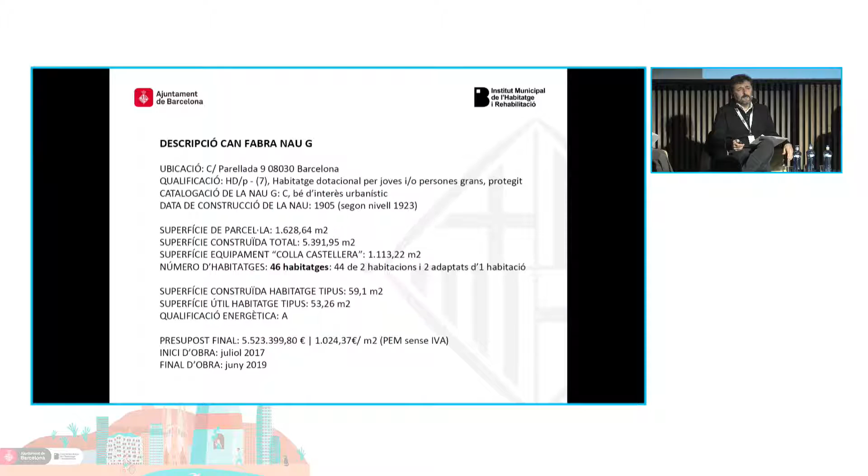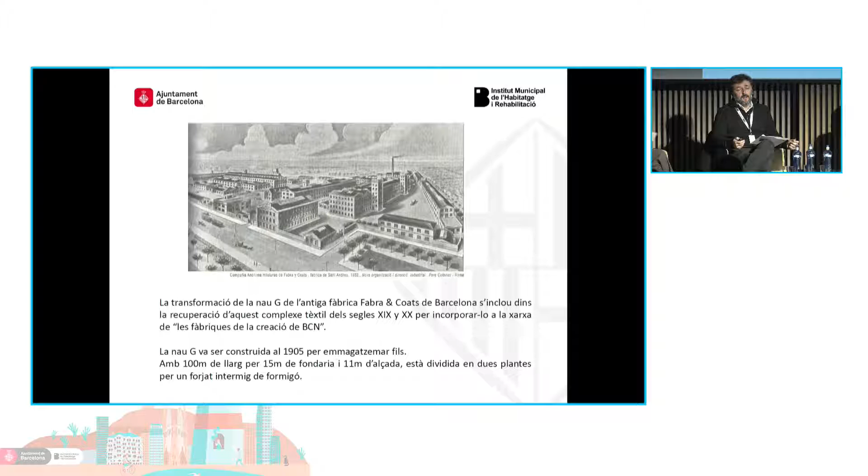Let's start with the Can Fabra G Nave. It is an old factory premises. The structure of the factory is 100 meters long, 15 meters wide, and 11 meters tall. It's split into two stories, two floors, and the purpose of the commission, which was innovative in itself, was how to bring together this structure - how can we combine such a factory structure with the construction of housing inside? The purpose in itself was quite innovative.

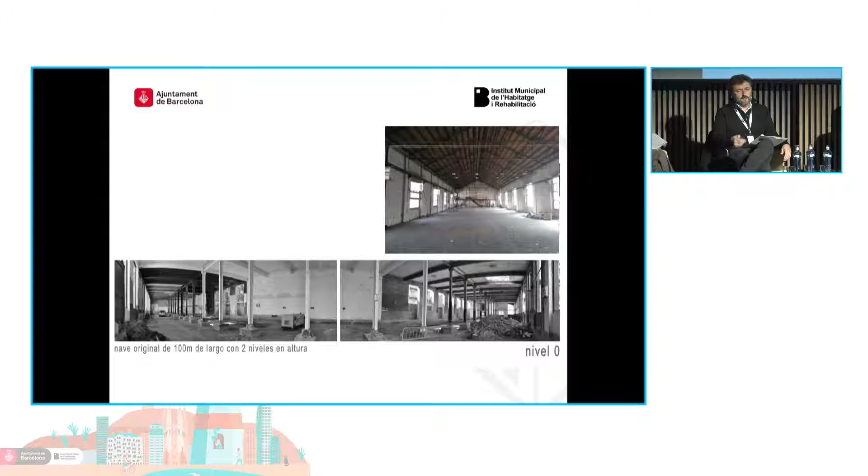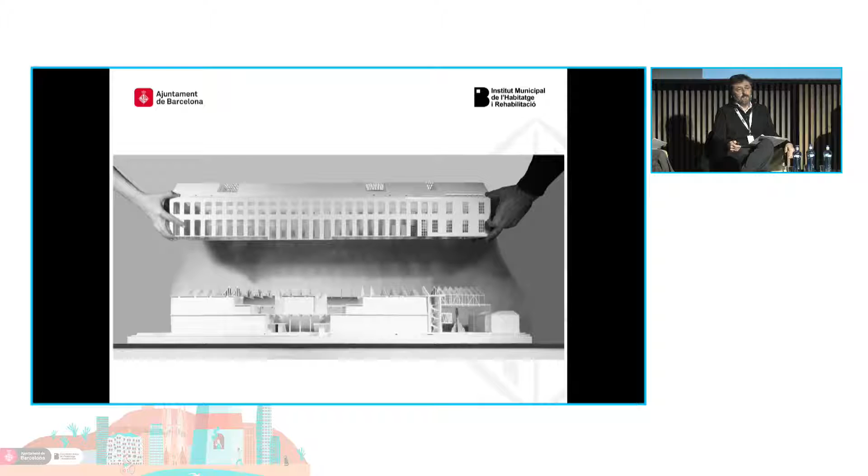These are some views of the original factory. This is the first story and the second story with completely clear structures, and we wanted to build as respectfully as possible.

We wanted to include wooden elements. This image is very clear. This is what existed in the past, the open plan floors, the two levels, and how these wooden modules can be included in here. In the end, we will have 4 stories within the envelope, within the original structure.

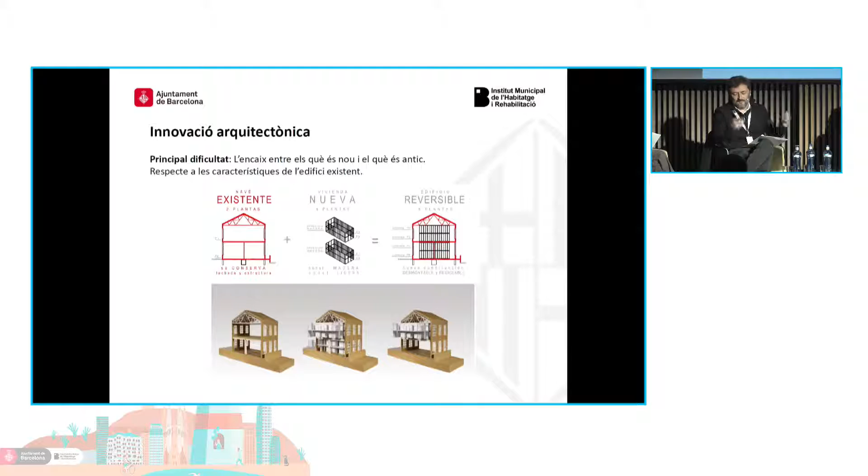This allows us to say, okay, let's do this reversible. Let's undo the woodwork if necessary, although that's not the purpose at all. These are some of the images, some of the views from the inside. Most of the housing is done in wood.

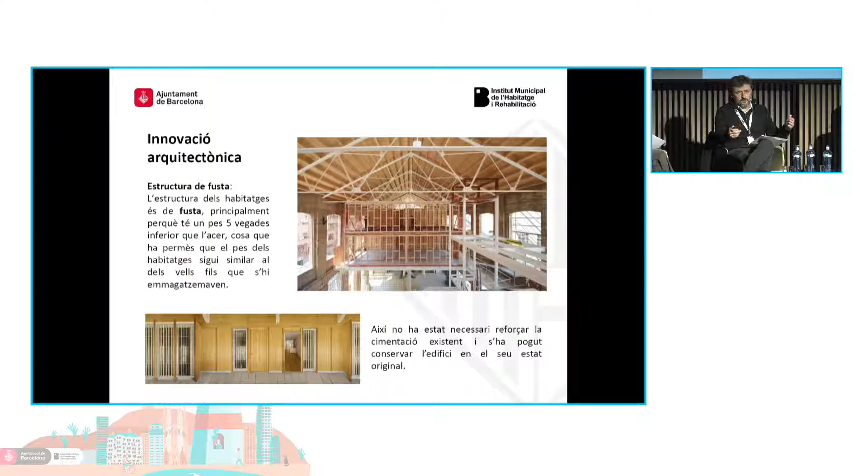Why? Well, because wood is lighter than steel structures, and this allowed us to avoid having to refurbish the outer structure and the foundations. It's drywalling, all assembled, and it can be disassembled in the future if necessary.

We now have, well, the old building, the old envelope acts as thermal insulation, and we have 2 corridors for air circulation. It acts as thermal buffer, and the top is like the roofing of the buildings.

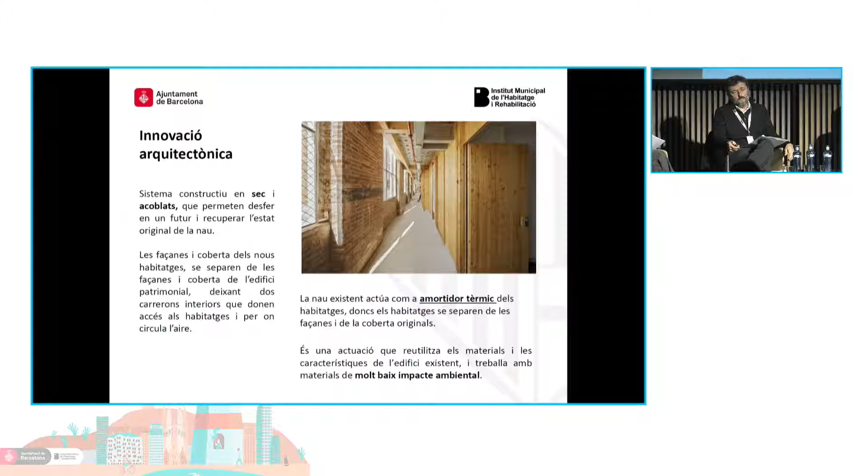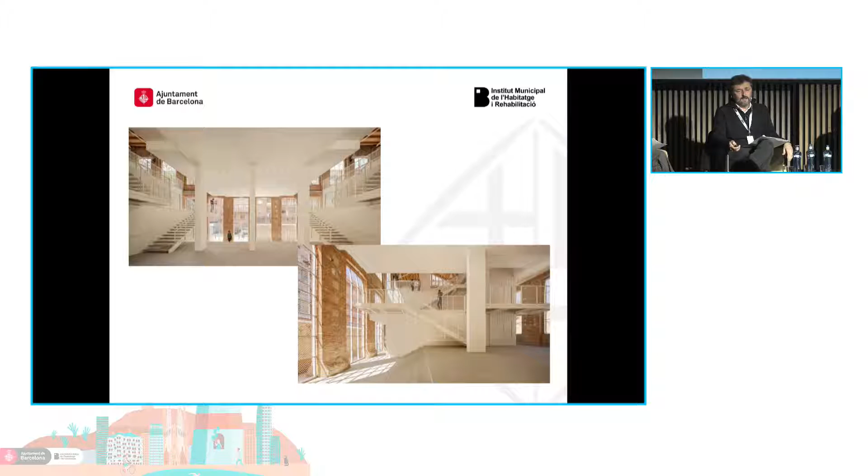We looked at an initial plan. Actually, the work that we started on that chapter stopped with the pandemic, but we were discussing with the neighbors about what could be the eventual use of all these areas. So you see, for instance, the lobby, which is really huge and can have a community use.

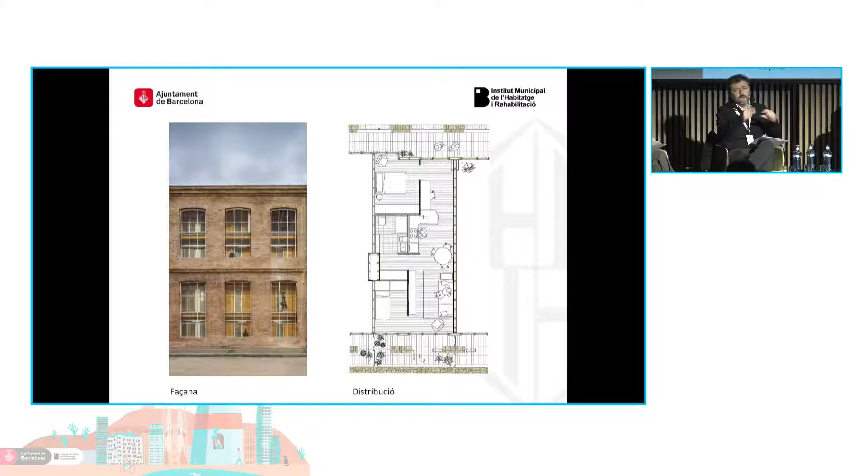This is the design of the plan with the 2 corridors which are left there inside of the warehouse building, but outside of the housing units. This is the look, the general plan of the factory.

And then we wanted to look at the different models, and not only architectural or social innovation, but rather to study the model. And this provisional proximity housing. Here we proposed to reuse maritime containers to create structures that would allow for quick accommodation.

This is an innovative element because we are reusing existing elements. It is quick. It takes much less time to put together a development of this sort than with traditional housing.

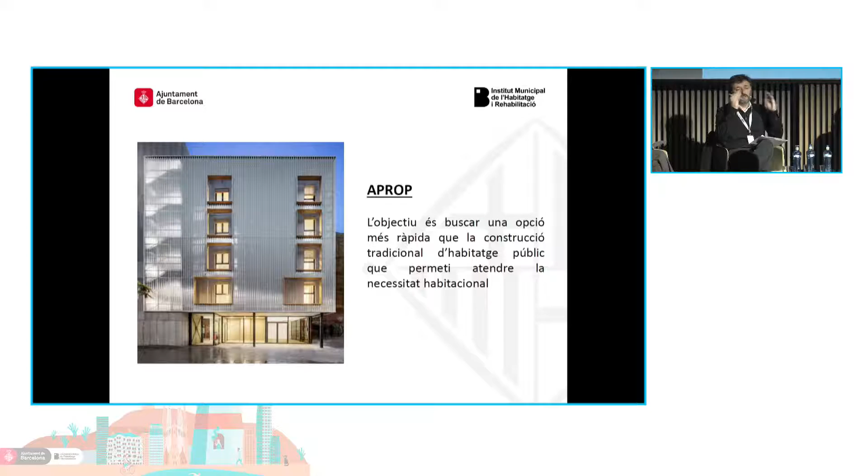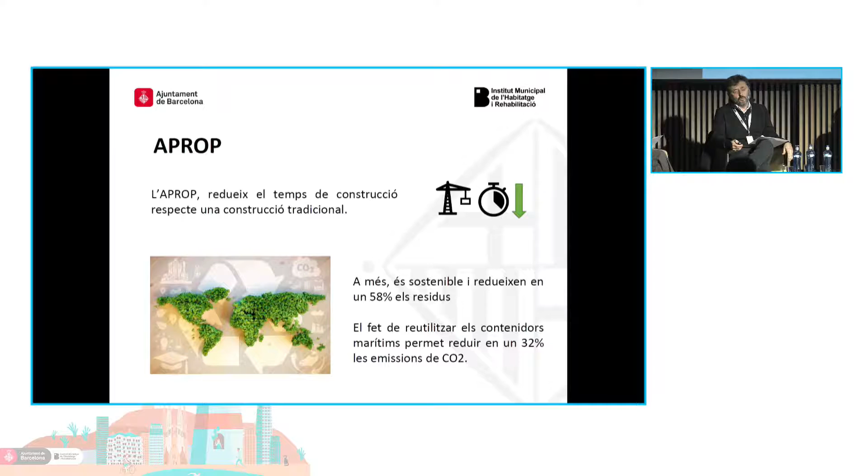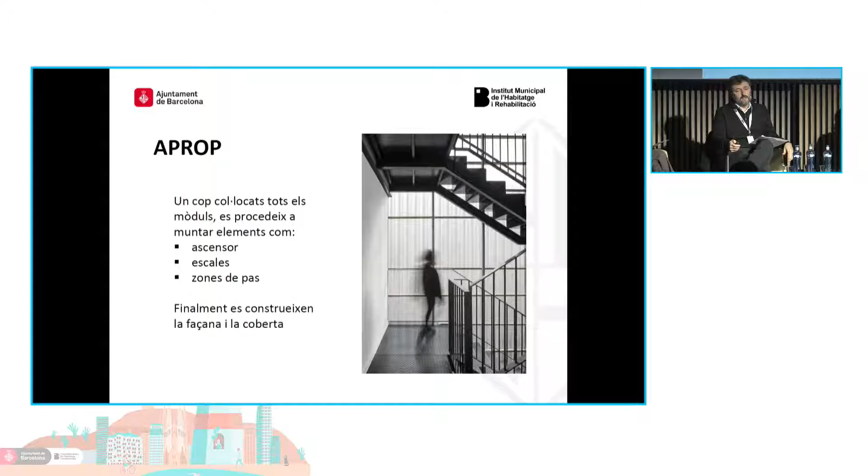And then the cladding of containers, of the original containers, we said that this was a quick way of reducing 58% of all waste. We have a lower CO2 emission impact. Once everything is built, then we install the elevators, the staircases, and all of the common areas.

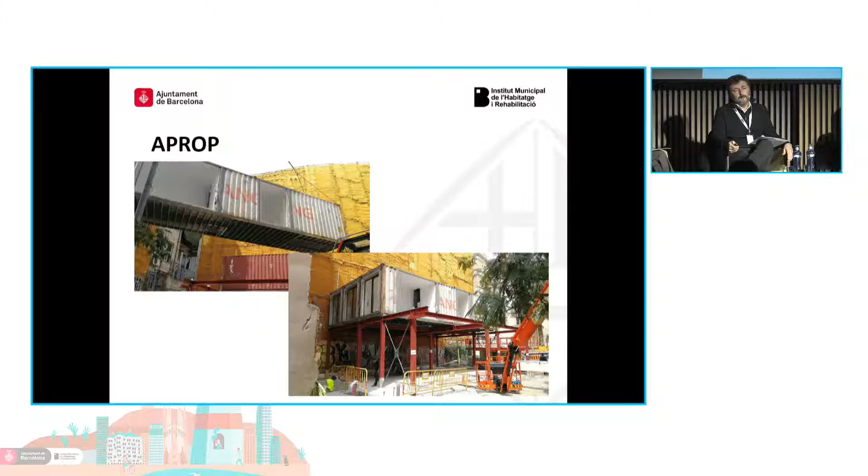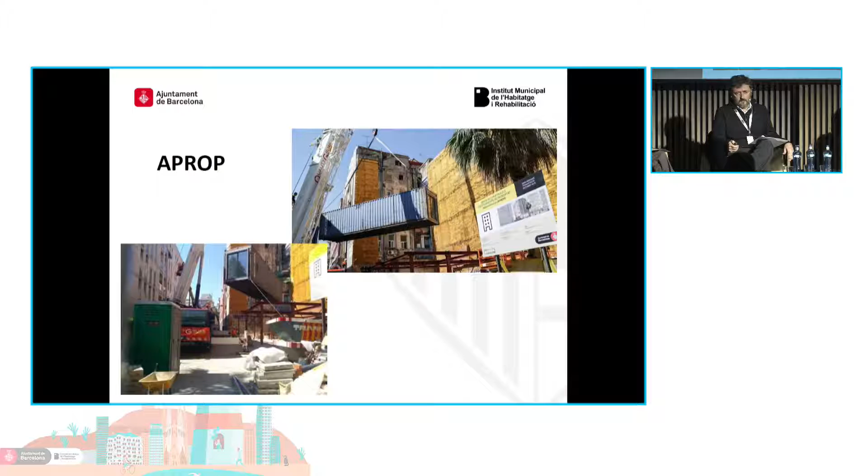These are containers as such, and they were added to the structure. The ground floor is usually common facility, common spaces, and this is the building process that we have underway at the moment. We have a 12-module development in Ciutat Vella.

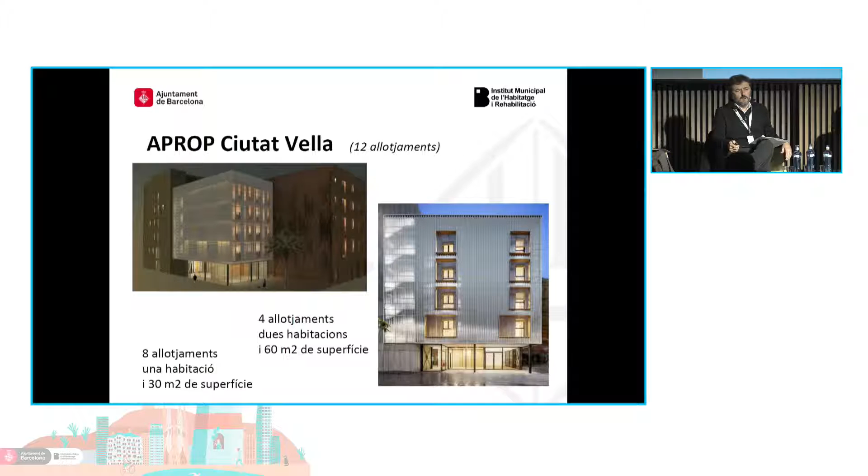And here you see as the containers pile up, and then what it looks like at the end with the cladding and the facade that we add to the containers. This is the inside, and it's very standard. It looks like a normal house.

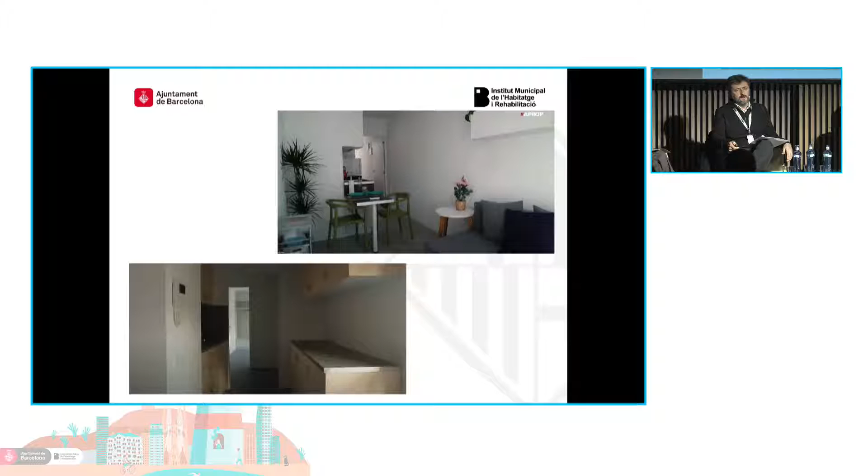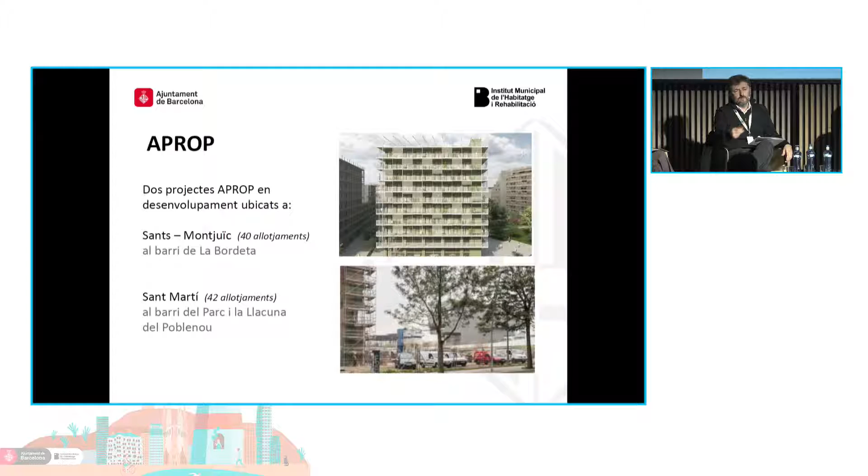And we have two additional projects that we are building at the moment, one in Ciutat Vella and this other one in Sant Martí, managed by the Social Services Municipal Institute, and this other one, Sants Montjuïc, the one on top, which is being built by our organization, our institute, 10 stories high, 40 houses.

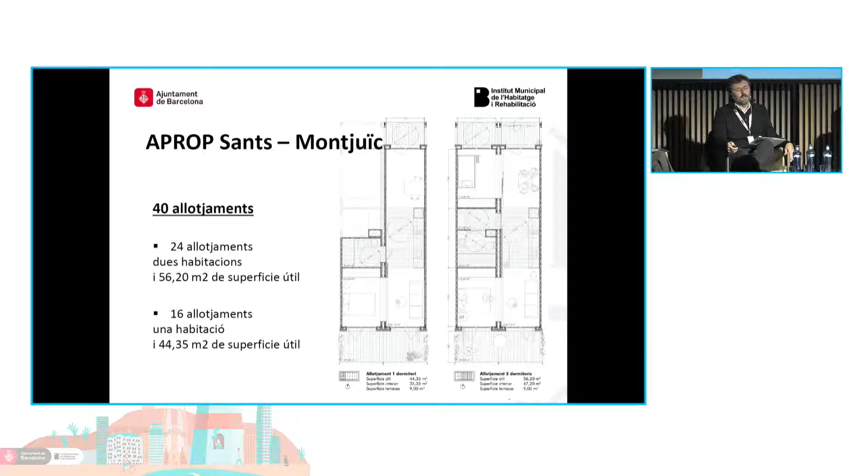Housing units, and each module is 1.5. Each housing unit is 1.5 containers, so to say, to make it a little bit bigger. And that's about it. If you have any questions, please don't hesitate to ask.

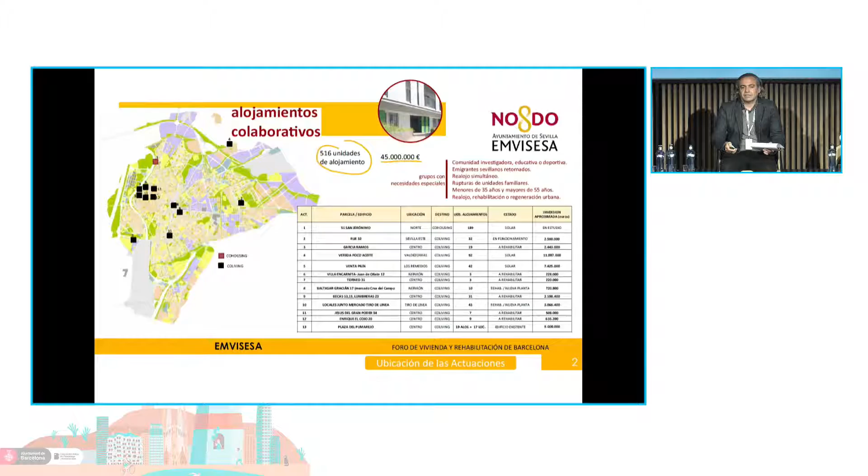We are defining our strategies for the future, and where we stand now, looking at the current housing plan, we are going to invest 45 million euros in 516 units. Here we have some homes which were given to us to define how we are going to build the whole system, which is currently out for tender to architects.

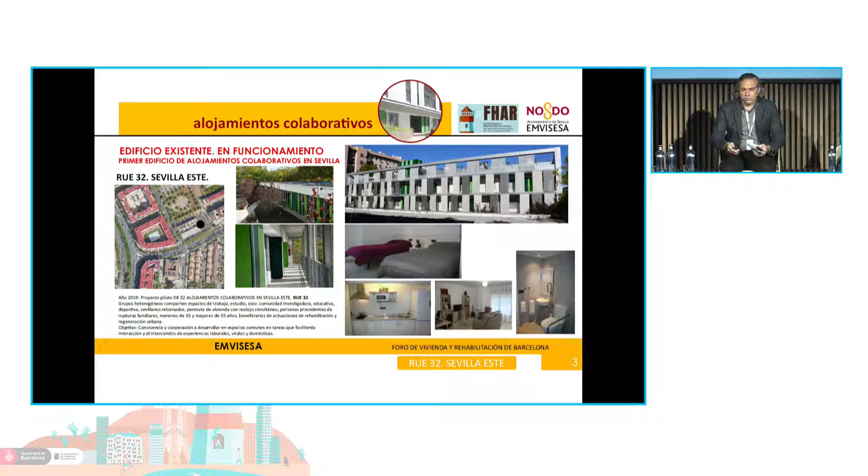We have seen that these kinds of programs combine very well with procurement, with the buying of houses. So we buy homes from people so that they can become our tenants. In the past, the law did not allow for this. For instance, if an elderly person owns a home but doesn't have any income, that person couldn't even lead a normal life, because they were basically locked up in their home without any resources or income.

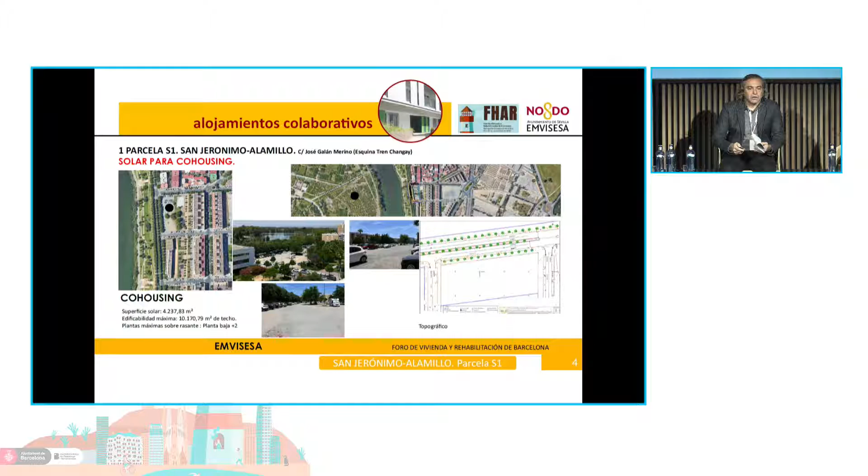When we were thinking about how we could include these persons, we realized they had an asset we could use. These homes could be added to our municipal housing stock, and that's what we do. We renovate them, and then we can give them to other families who don't have the difficulties elderly people have, since those homes, built 40 years ago, are probably not suitably equipped for elderly people. So this is what we're doing.

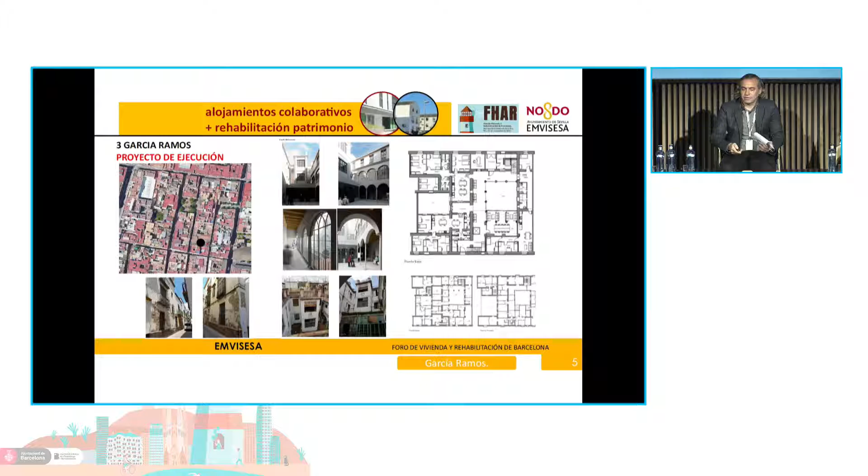We are including more and more homes in our public stock, especially from homes in the city center, or in areas that are so busy, where there are so many people living that there is high tension. This is Sevilla.

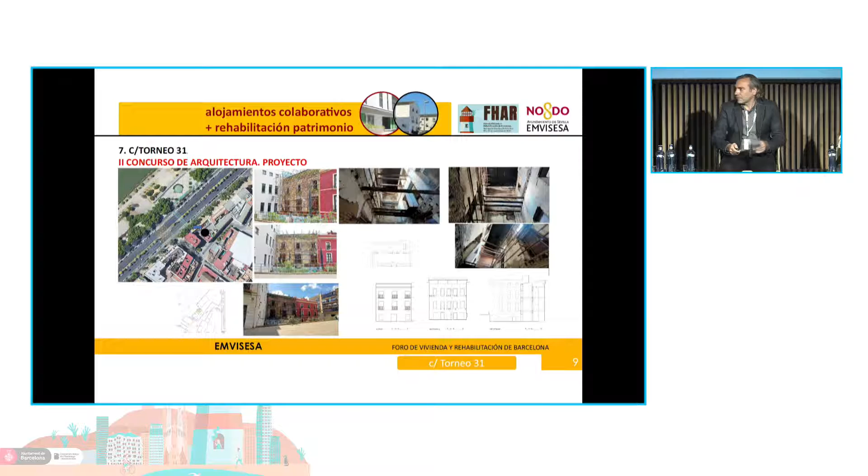In any case, that's all I wanted to say, and I'll be happy to answer any questions you might have. Let me make myself available to you. Thank you.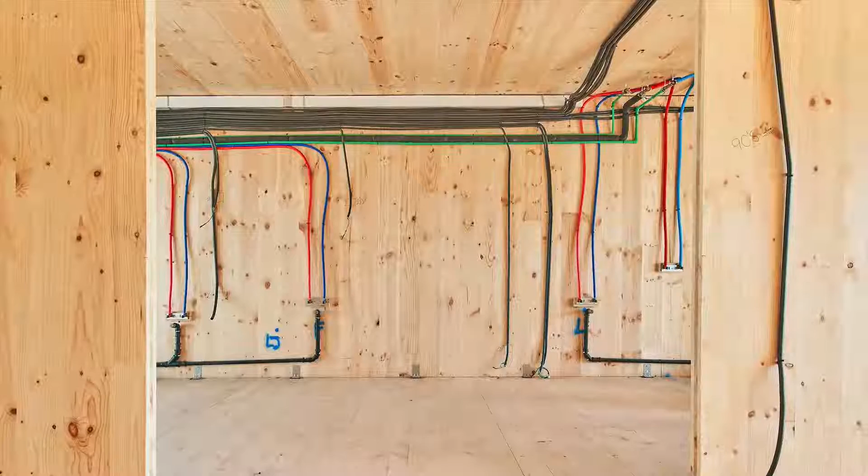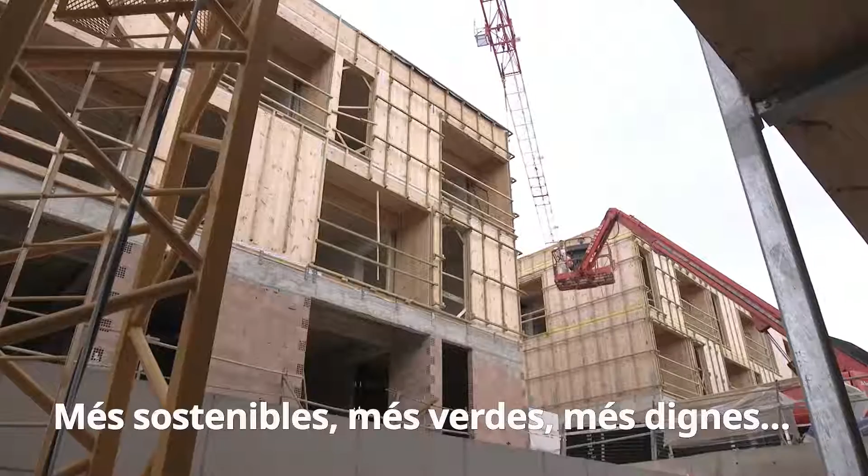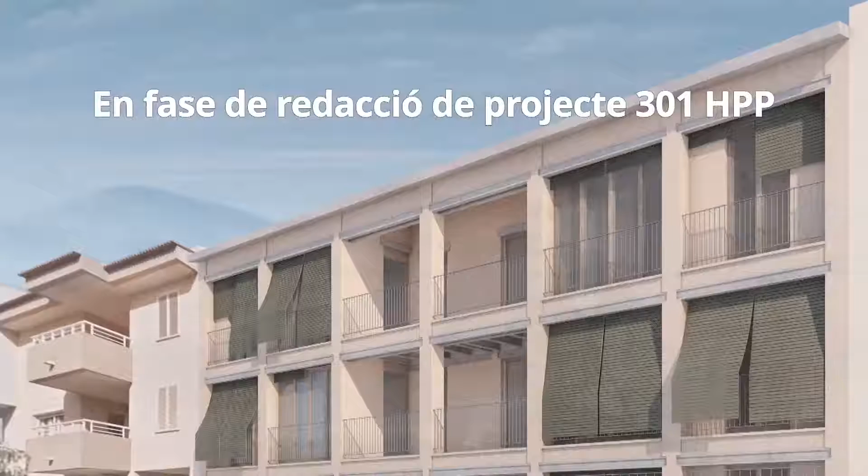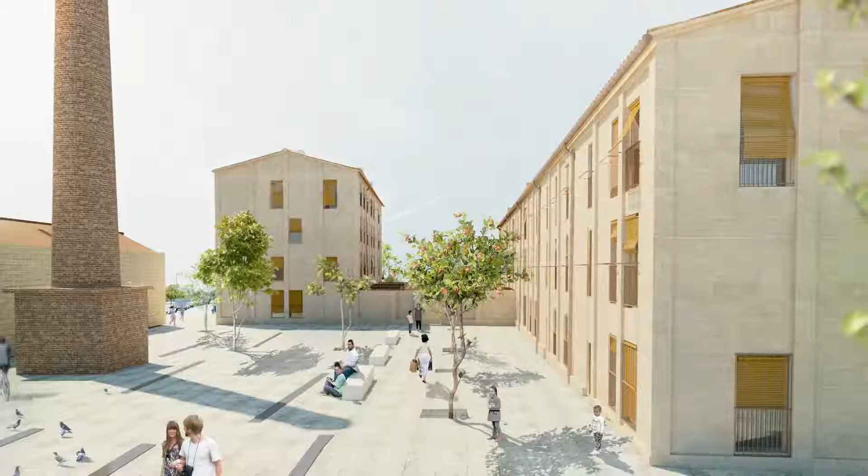We will change the public housing paradigm. We promote the cities of the future: more sustainable, greener, proper, and worthy. Article 47 in the Spanish Constitution: all Spaniards may enjoy the right to housing. We incorporate over 1,000 new public houses. These are under construction. We are preparing the projects for 301 new houses. They have been acquired via preemptive right, and we will carry on. We will face the housing emergency and the climate crisis. Low environmental impact architecture, reducing CO2 emissions, sustainable premises, kilometer zero, proximity. We promote urban mining projects, circular economy. We will try to make as much out of waste as possible, energy efficiency, gender perspective being cross-cutting in all our projects.

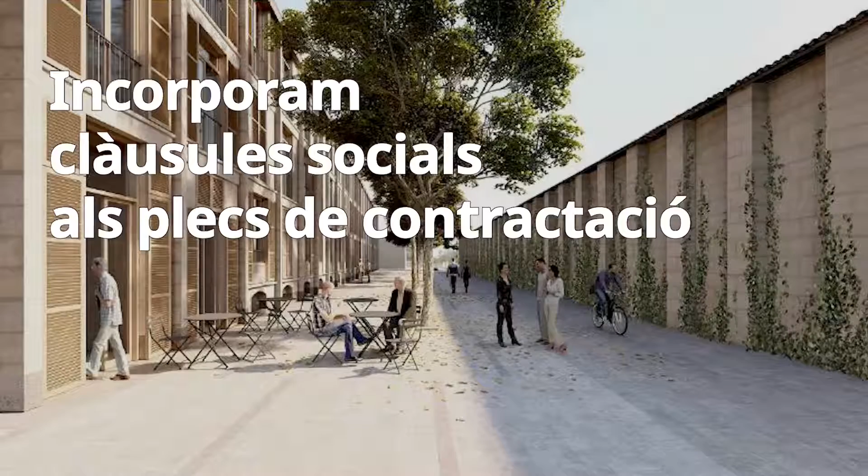We are not living in a house, we are all sharing the same ecosystem. Great, so that's the summary of my presentation.

End of the story. Now, what we are trying to do is to take into account, especially while we are refurbishing or building new flats, is to incorporate this strategy right from the beginning, until we are handed the keys to the apartment. So we understand sustainability as a holistic sustainability.

There's no need to even describe what housing emergency means. Climate emergency is a fact, healthcare emergency linked to an economic recession, which happens every now and then. So lots of emergencies and lots of crises, and we need to take into account three basic aspects here: social, environmental, and economic value. So the three tiers, the three pillars, trying to minimize the negative externalities and foster the positive aspects.

So we want to contribute to these sustainable development goals, because if we need to face the housing emergency, sustainable cities and communities, we need to make sure that everyone has the right to housing. So we need to increase the public housing stock. Very important. And the public authorities in Spain, I believe, are not on top of it too much.

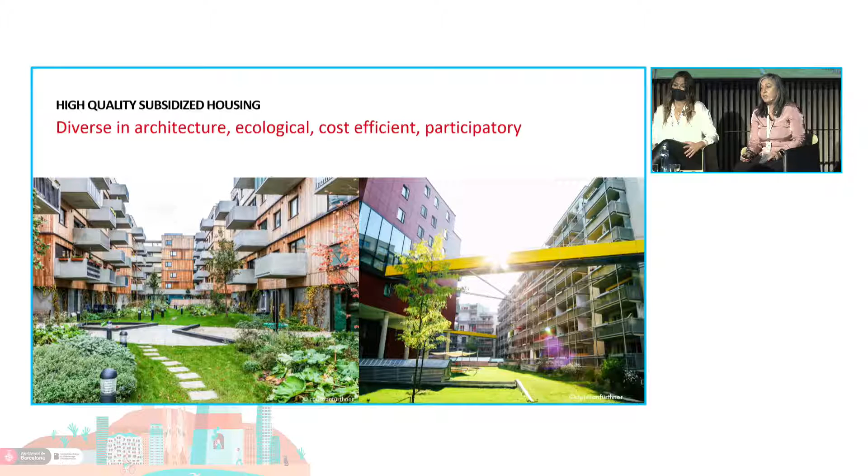There are high standards, so whatever is erected in the form of subsidized housing has to meet high architectural, ecological, cost efficiency, and participatory standards. We organize this through competitions. Every non-for-profit corporation that wants to construct a subsidized building has to choose a team of architects and will compete against others for one piece of land. The criteria are social sustainability, architectural quality, economic sustainability, and ecological quality.

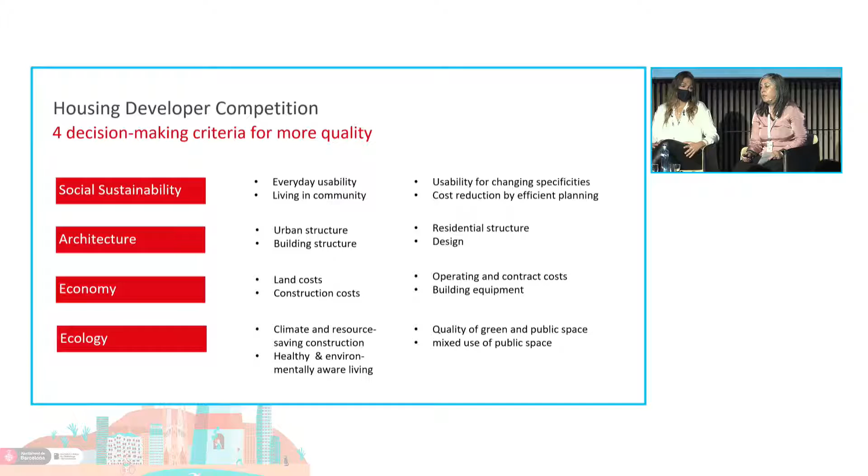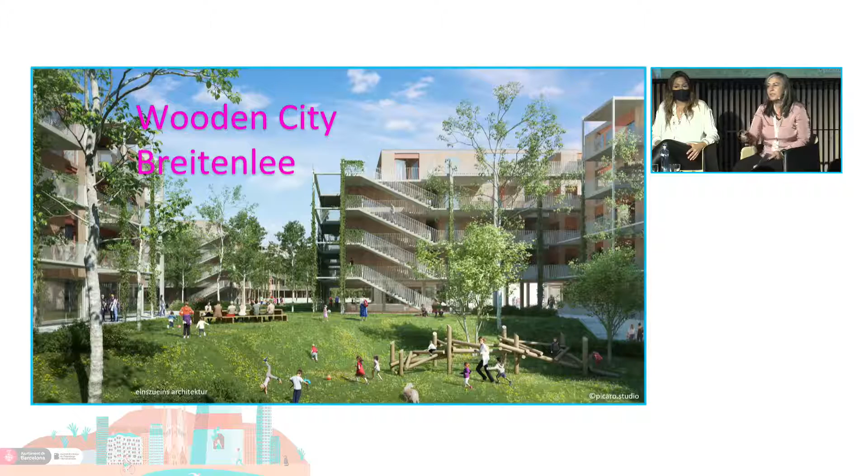The city invests more than 500 million per year, and there's a threefold subsidy that goes with it. Subsidized housing is erected on cheap land. Part of it is purchased by the city through a land fund, which buys it and then sells it to housing corporations at a very cheap price. Then there's a direct subsidy for construction, and also a subsidy for future residents, for citizens who may still not be able to afford the entry price.

Let me arrive at a few examples, and then I'll leave it at that. First of all, what is life quality, though? Because it is about life quality, and when we're talking about innovation in social housing as well, it is about life quality. I say life quality is living in a place that's good for children. Why? Well, it's because young people, when they know the first child is arriving, feel like they have to move to the countryside or the suburbs.

They buy or rent a little cottage, so that the child can have a happy childhood and access to nature and perhaps water, and be able to move around and play freely. Once they have done that, this is where they spend the rest of their lives, in hideous traffic jams, trying to get to work and bring the kids to school.

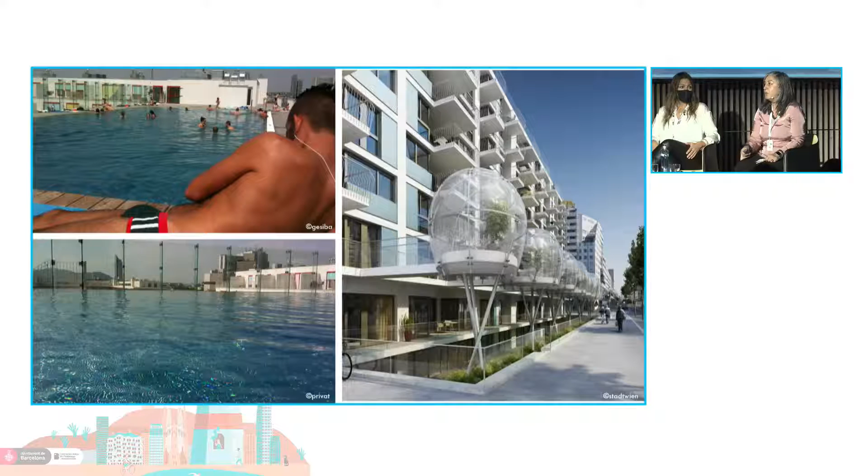Just to give you an example of the way we go about it, there's another project in the same area called Bike and Swim, and it has a swimming pool on the rooftop. This is actually economically sustainable if you skip building garages for cars. So the idea is also to work this way.

The last project I would love to share with you is actually the most current, recent twist in Vienna's social housing tradition. These are collaborative housing projects, created entirely by their own residents and planned entirely by them. Each and everyone can plan their own units, and they have spaces for community.

This is also part of this kind of social innovation that results from the budget you can reallocate for such uses, because you're not creating garages underneath each and every object. There's also community farming just around the corner. And I will leave it at that and say thanks for listening.